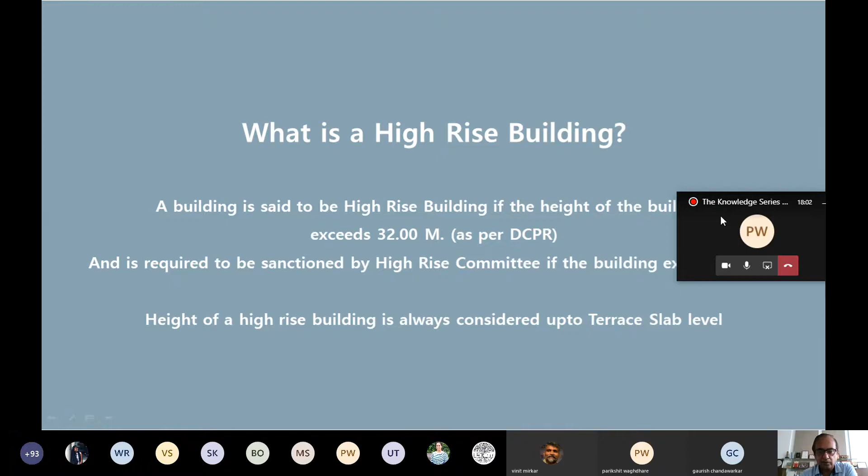When you consider the civil aviation NOC, even the water tank, lift machine room, and any other elevation features added on the terrace are also part of the civil aviation height consideration. However, when we talk about the height of the building, it is up to the top of the terrace slab.

So these are the parameters we need to look into for access criteria. For a high-rise building, these are the important factors. First and foremost is the access criteria - whether your plot is abutting to a particular width of road determines how much height of building you can construct.

When we enter the plot, the open space criteria comes into play, which is for light and ventilation, and the CFO requirement - because to fight fire within the plot, the fire engine needs to enter the property, and they want some basic criteria for open space requirements beyond light and ventilation.

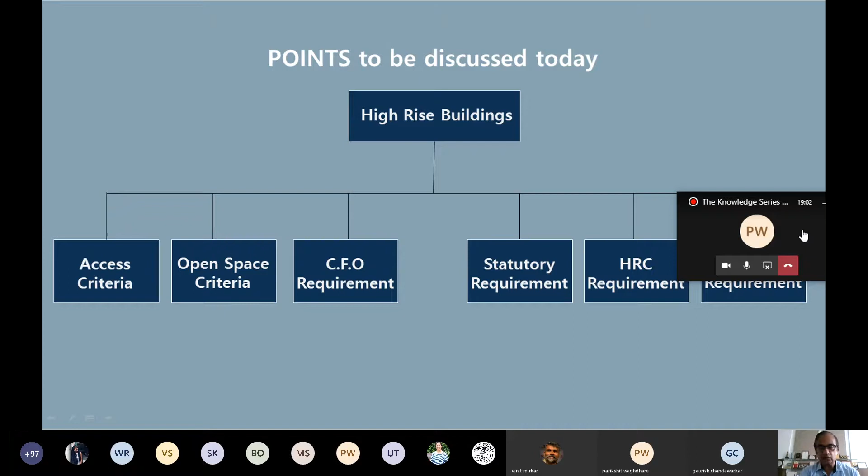And what are the other statutory requirements? Then there's HRC requirements and MOF requirements. So these are all the issues we are going to discuss in this part.

So public means of access - what is the public means of access required for any building? Every site should have access free of encroachment. Every site proposed to be developed or redeveloped shall have an access from a public street or road.

Such access shall be kept free of encroachment. So whatever width they mention in this table has to be free of encroachment, and it should meet at the particular junction with the other road.

So there are three parts to it. One is a high-rise building as per the table, whatever width of road is required. And there is some leeway - if there are two roads which are minimum 6 meters, then also a high-rise building will be permitted up to a particular height.

And if there are redevelopment proposals, particularly under 33(7), which is a cessed structure - 33(7)(a) is a tenanted building in suburbs not covered under cess, 33(7)(b) is a cooperative housing society, and 33(10) and 33(10)(a) are both slum redevelopment - there is a leeway for those kinds of proposals also.

Now, for high-rise building up to 32 meters, between 32 and 70 meters, you need to have a 9-meter road.

If the road is 6 meters... 32 to 70 meters, a 9-meter road will be required. And if the building height goes between 70 to 120 meters, the minimum width of road required increases.

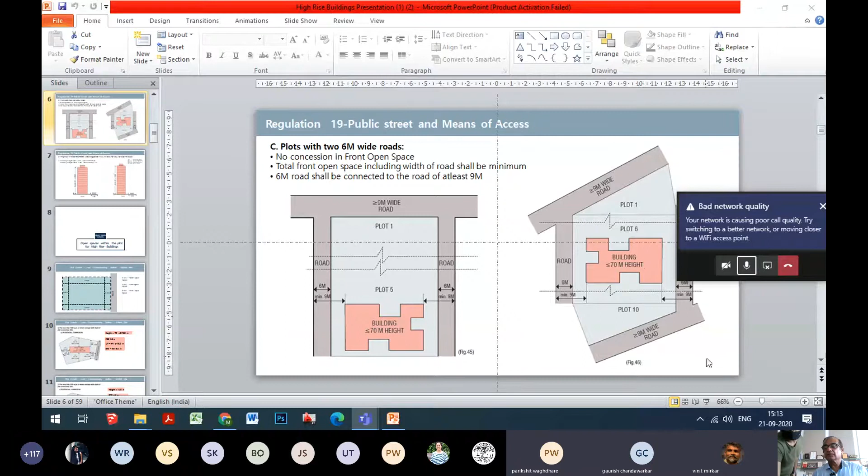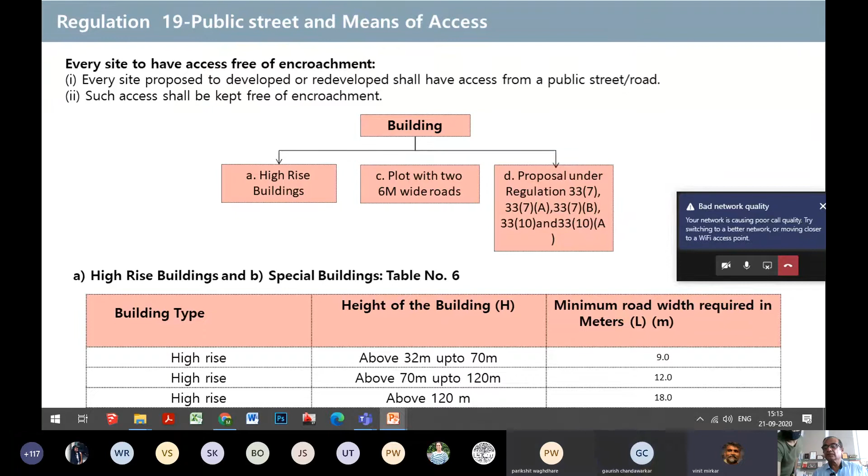Sir, you are not audible. Raisarya sir, you have to unmute yourself, sir. Hello, Parikshit. I guess he has a network issue, so he's trying to change over. He's unmuted now. Can you hear? Yes, we can hear you. Just switch off the video so that the audio network is better. Yes, sure. Can you see the screen? Hello, yes we can. It's audible, right? Yes, it's audible now.

So if there is a lesser width of road, but if you have two roads abutting your property, then even that height can be permissible up to 70 meters.

The criteria is: if two 6-meter wide roads are there, no concession in front open space will be granted. Total front open space, including the width of the road, shall be minimum 9 meters, and the 6-meter road shall be connected to a road at least 9 meters wide.

So where two roads are there, they have to meet the 9-meter road criteria, and if these two roads are 6-meter wide, the building height can be allowed up to 70 meters. So the table which we saw in the earlier slide will be relaxed if there are two roads.

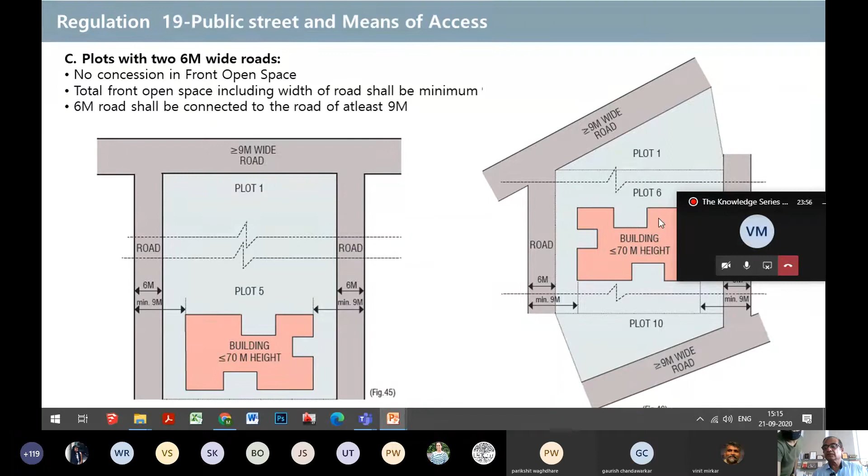And the example is also shown on the right hand side - there are two roads here, both 6-meter roads, ultimately culminating into a 9-meter wide road. So up to 70-meter height of building can be permitted.

Now, proposed redevelopment under 33(7), as we discussed in the redevelopment criteria - 33(7) is the cessed buildings in Island City, 33(7)A is tenanted buildings in suburbs and Island City also not covered under cessed category, and 33(7)B will be for cooperative housing society and slum redevelopment.

So building height up to 120 meters, road width can be 9 meters. In the other case, it was 12 meters. Here in all this redevelopment, they have relaxed it, and on a 9-meter width of road, 120-meter height can be proposed.

And if you want to propose more than 120 meters, the road width has to be minimum 13 meters. In all other proposals, this criteria was 18 meters. So as written here, 33(7) and whatever categories are there, it has been mentioned here.

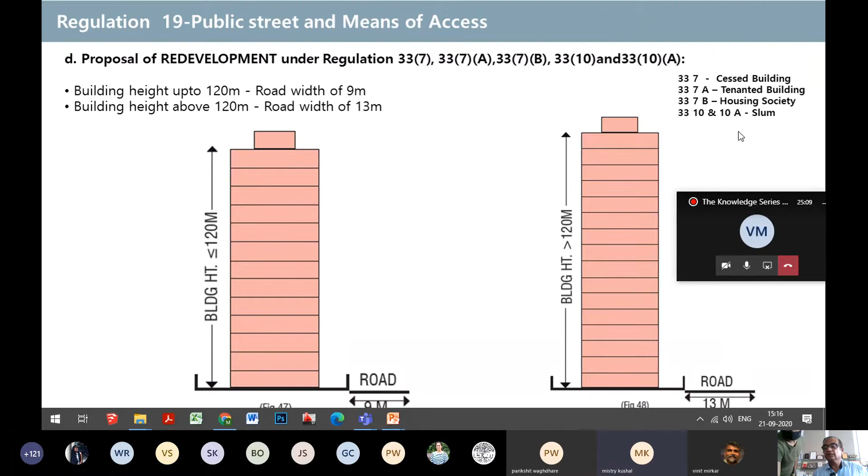Now we are moving on to the open space criteria. Open space is within the plot for high-rise buildings. So these are the front open space, side open space, and the rear open space. Two are side open space and one is the rear open space, front open space. So what are these open space requirements for?

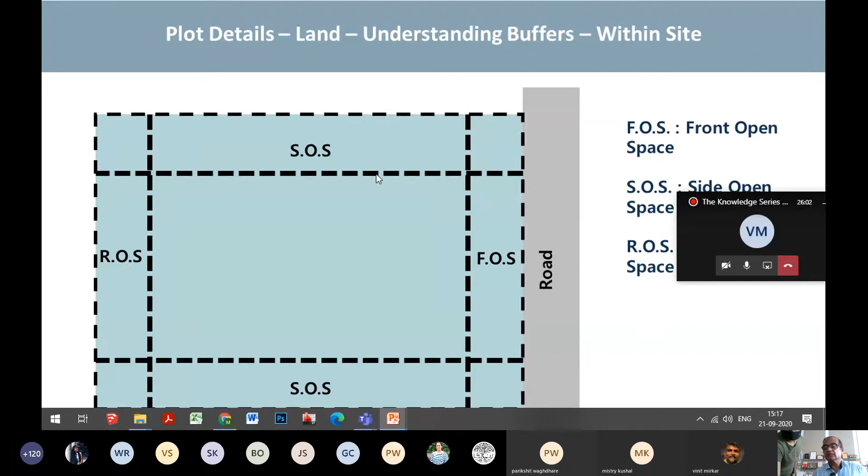Front open space is governed by other regulation where 4.5 meter is the constant front open space to be provided for any building, and the side open space and rear open space have been prescribed in regulation number 41. This is the criteria for building height between 70 meters and 120 meter height of a building, where front open space will be 4.5 meters, light and ventilation will be h by 4 or 16 meters. So 16 meter is the maximum open space to be provided. If it is a lesser height, even h by 4 also you can propose.

Whenever there is a dead wall, at this junction these are all 9 meters. This has to be light and ventilation, so it is 16 meters. Again at the corner, these are all 9-meter open space, and wherever we are taking light and ventilation, this will be 16 meters maximum open space required for a particular building. So even if you consider 1/4 of 120 meters, ideally it should be say 30 meters. However, the concession has been given, the maximum they have capped it to 16 meters for light and ventilation. So all these corners, wherever there is a dead wall, this will be 9 meters, and obviously front open space will be 4.5 meters.

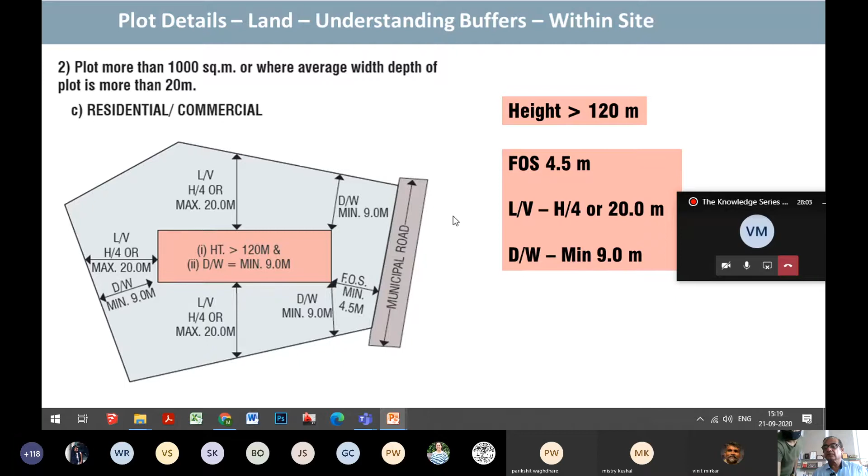Now buildings having height more than 120 meters - what are the criteria? In that criteria, front open space remains constant. Light and ventilation becomes 20 meters instead of 16 meters as in the earlier case. That dead wall will be a 9-meter criteria. This can be any height of building. Suppose if it is a 300-meter building, h by 4 criteria will require 75-meter open space, but that much open space is not required to be provided. Maximum is 20 meters. That is what the open space criteria will be looked into for a building which is more than 120 meters.

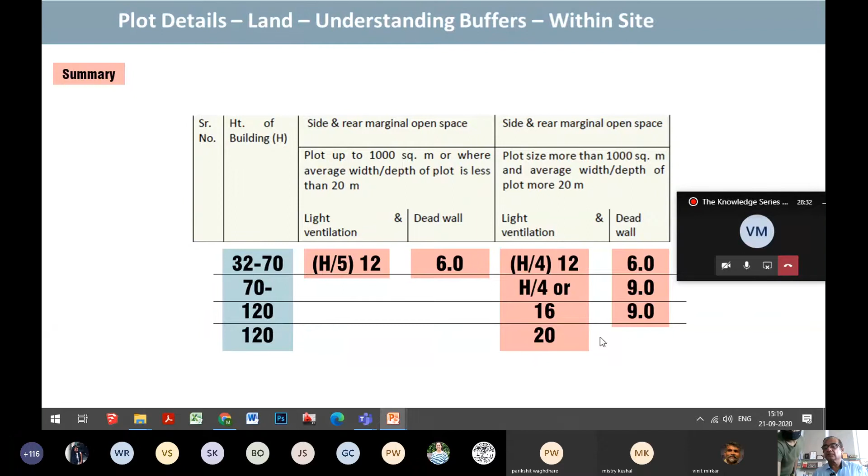Now this is in a nutshell. Of course, 32 to 70 I had not shown that open spaces, but this is the table where even open space of h by 5 also is permitted, with a minimum dead wall of 6 meters and the maximum open space of 12 meters. Between 70 and 120, 16 meter is the maximum open space, or h by 4, whichever is lesser, and this will be 20 meters for buildings more than 120 meters.

So for the height of building between 32 to 70 meters, any one side, that is A or B, must be 6 meters. In this case, suppose we are providing a 6-meter open space for the fire engine to enter and fight fire, other open space that you can decide as per your planning.

For building height more than 70 meters, if it is a rehab building, then one side needs a 9-meter road with 9-meter open space. This leeway is given only for rehab buildings, but for a sale building with no redevelopment, two-side 9-meter road is a must.

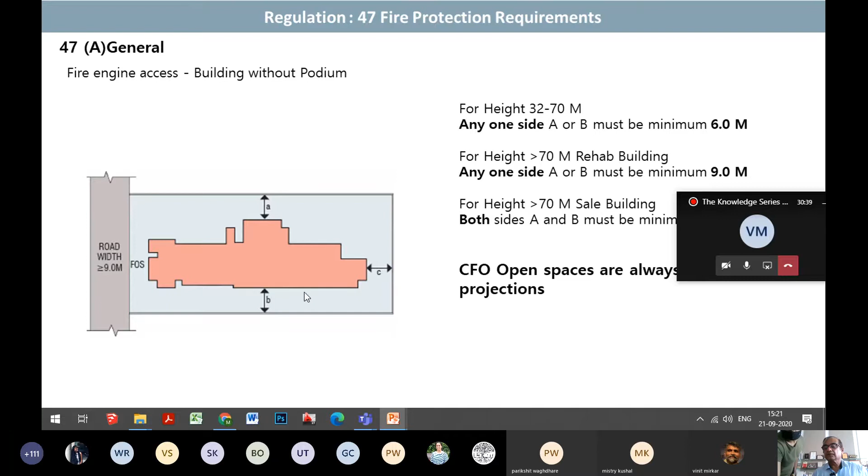So both sides A and B will be 9 meters. In case of rehab, this can be 9 meters, and this open space can be as per your planning. The CFO will not permit any projections in these open spaces, not even the Chaja line. Only the cantilevered portion of a refuge area can be proposed in these open spaces. Otherwise, the building has to have an open-to-sky open space.

Now, whenever we propose a podium, what are the criteria? Since 9 meters is the open space required at ground level, they will allow setback only up to 6 meters. This is because if the fire engine is here and the tower is for rescue, they can go up to only 6 meters - that's why this 6-meter criteria exists. Earlier this was at 3 meters, but now it's 6 meters so that you can have a driveway on the podium level on top.

Even in this case, a 6-meter leeway is given, but you can project by 1.5 meters outside. Even if this is a 9-meter open space at the ground level, for a height above up to 4.5 meters you can propose a 6-meter open space. So this you can encroach by 3 meters, but at ground level 9 meters is available so the fire engine can be parked there with its supports.

Up to a height of 4.5 meters there is a restriction, otherwise the building can come out. So the podium cannot extend 6 meters beyond the building line, for the fire engine staircase, fire engines, and hose reel to reach the building. In case of podium height of 4.5 meters from the compound wall, the podium must be 9 meters clear, and above that, 6 meters clear open space has to be provided.

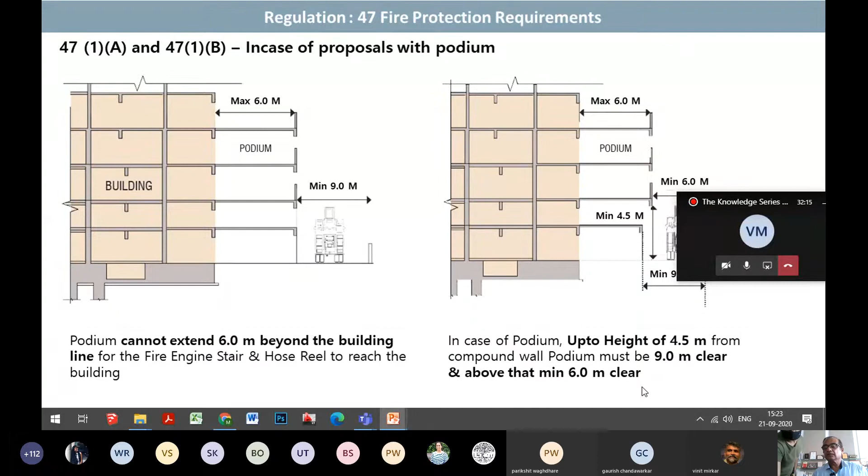Now regulation 47(1)(a) for the proposals - these are all redevelopment clauses. 33(5) is MHADA redevelopment, 33(6) is redevelopment for dilapidated buildings. Again 33(7), 7(a), 33(9) is cluster, 9(a), then 9(b), and 33(10) and 33(10)(a) - these are all for redevelopment.

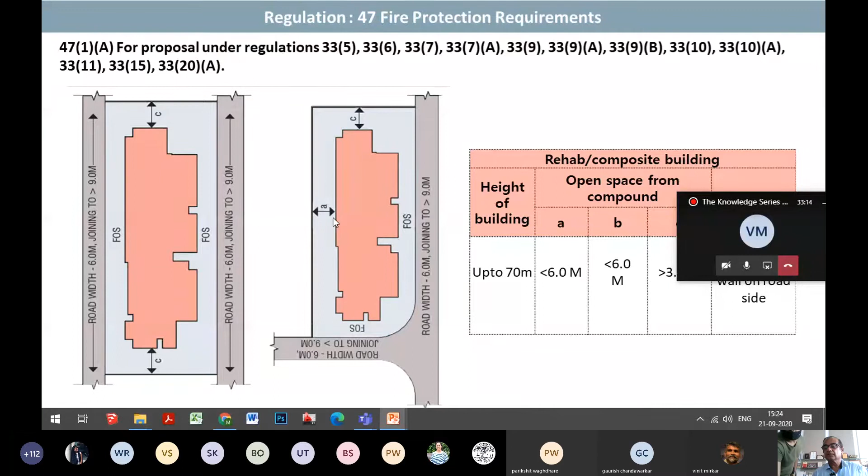If you have two roads which are 6 meters, then you need not provide any side open space of 6 meters. This C open space can be as per your planning - you can provide minimum 3.6 or 6 meters as per whatever the planning criteria permits. Even here, if there is a junction, that means these properties also have two access roads, so front open space is enough. This 6 meter need not be provided, and the C and A open space can be as per your planning.

Now, internal staircase - how should a staircase be designed? If there are 4 flats per floor numbered 1, 2, 3, and 4, these are the passenger lifts, and the staircase area is here, abutting the external open space.

This staircase is approvable with the ventilation shaft, because the ventilation lobby should also have external ventilation. So this is approvable with 2 lifts and the staircase criteria, but this one is not approvable because it does not have ventilation to the lobby - the lift lobby does not have any ventilation here, that's why it's not approvable.

However, in this case there is a ventilation lobby. This staircase is not like that case - it is internal, but it has a pressurization shaft, which requires 9 square meters. Internal stairways with pressurization shaft are allowed, but they won't be considered as a CFO staircase.

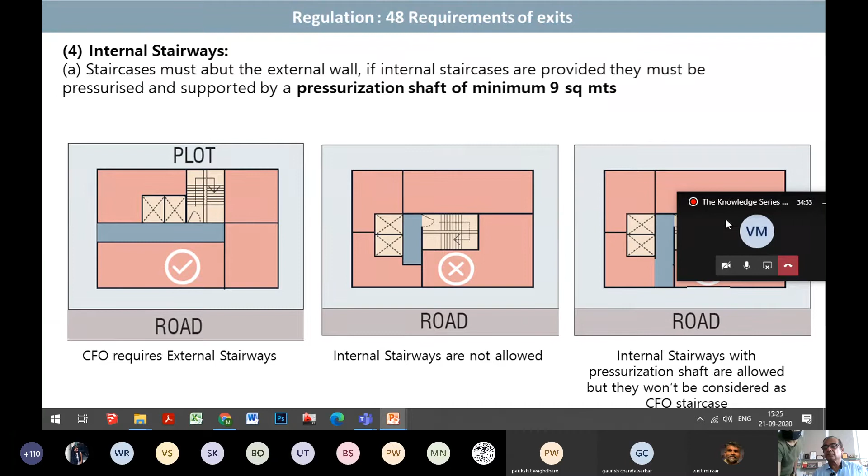What does this mean? When the building height goes above 70 meters, we need to provide a second staircase. So one of the staircases has to be on the external side, and the second staircase can have a pressurization shaft and be an internal staircase.

No open staircase is allowed for high-rise buildings. This type of staircase is not approvable because it needs an enclosed staircase. This is the enclosed staircase with a door closer, so it remains always closed. So if there is a fire anywhere on this floor, this staircase is independent, and evacuation can happen. But here, if there is a fire here or on this side of the flat, this staircase is not approvable.

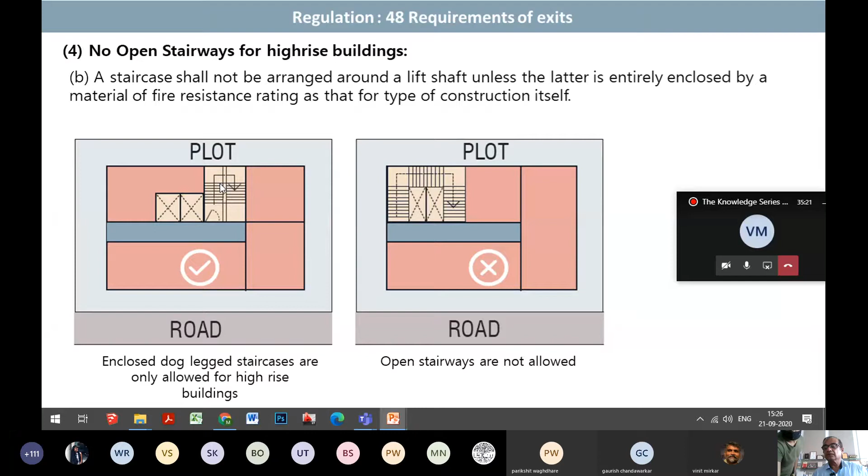This is a C-type staircase where the lift is in the center and the staircase moves around everywhere. Of course, this can be permitted for a building less than 32 meters, but above 32 meters this staircase is not approvable - we'll have to go for a different plan for this staircase.

Now, how do you provide access to the basement? The basement has to be cut off because it is considered more prone to fire. If the same staircase goes to the higher floor, the entire staircase will be gutted in fire. That's why the basement staircase access has to be separate.

In this case, this staircase moves up to the first floor, and this goes to the basement. So there has to be a wall constructed so that there is no aperture between the staircase going up and the staircase going to the basement. Where a building has a single staircase, it should terminate at the ground floor level, and access to the basement shall be by a separate staircase.

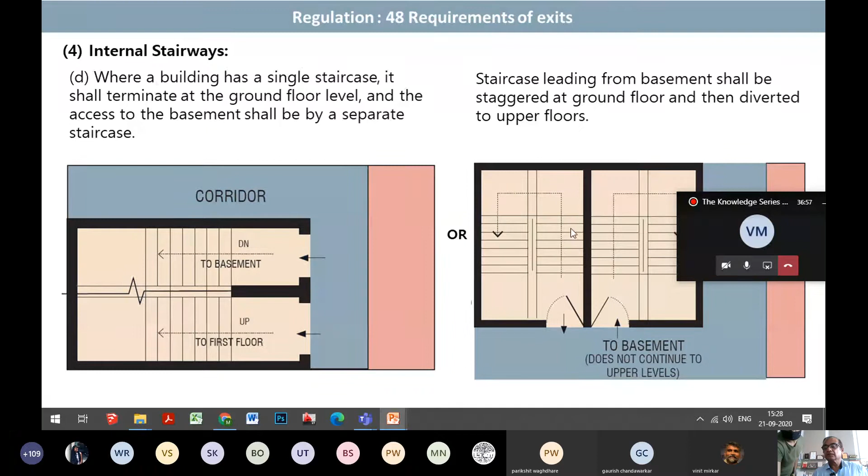Or this is a solution. If you are unable to design in this fashion, you can propose the main staircase terminating here on the ground floor, and a separate staircase going down to the basement. So they are both bifurcated. The staircase leading from the basement shall be staggered at ground floor level and then diverted to upper floors. This staircase to the basement does not continue to upper floors; it will be restricted up to the basement only. If you have one, two, or maybe three basements, this staircase will terminate here, and a separate staircase will start from the ground to the upper floors.

Now, additional staircases. There are norms for the number of staircases to be provided. Up to 70 meters, one staircase is permitted. Under what criteria is this allowed? For building height up to 70 meters, it shall be provided with two enclosed type staircases, each having width not less than 1.5 meters. However, if the floor area excluding staircase, lift and lift lobby area - the net habitable area - is less than 500 meters, then one staircase is no problem.

You can propose it if your staircase meets the travel distance criteria specified, that is 11.25 meters from the dead end. This is less than 11.25, so one staircase is allowable. And for a commercial building, if this is 15 meters, then also one staircase is no issue.

But if it doesn't meet this criteria - suppose hypothetically this area is say 600 meters - then obviously one more staircase has to be proposed. And if it doesn't meet the travel distance criteria, then also an additional staircase will come into the picture.

However, for high-rise buildings above 70 meters, there will be two staircases of 2 meters width each. That is a compulsion. Even though the floor area is say 400 meters, this criteria won't work because the cutoff level is 70 meters only, and once you cross 70 meters, the second staircase has to be provided.

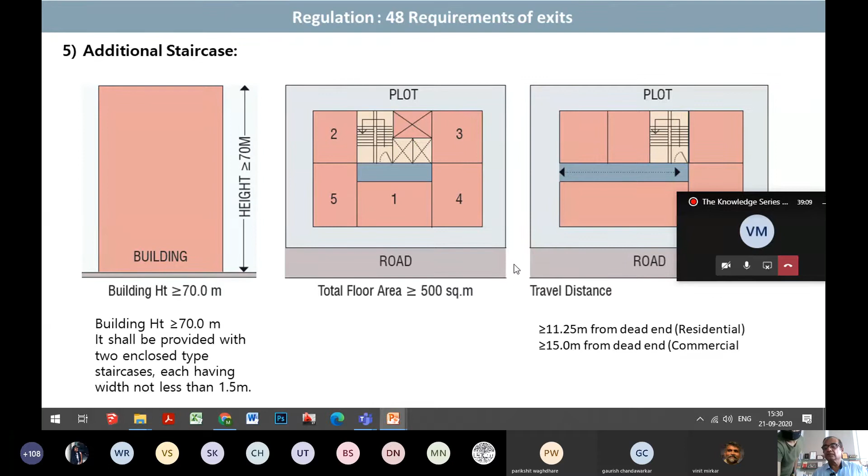There is one more criteria, which is the refuge area. The refuge area shall preferably be provided within the building line at floor level. Ideally all refuge areas have to be provided within the building line, and now cantilever portions are not allowed - earlier they were permitted, but now it's restricted within the building line only. In case of buildings more than 32 meters in height, the first refuge area shall be provided at 24 meters.

So if this building is 32 meters, at 24 meters the first refuge area will have to be proposed. Thereafter, the refuge area shall be provided at every 7th habitable floor - so you can have a gap of 6 floors, and at the 7th floor we'll have to propose the refuge area. The refuge area shall be 4%, though some leeway is given now. Earlier they strictly adhered to 4% only; now they are allowing between 4% to 4.25% of the habitable area it serves, and it will be free of FSI. But it cannot include staircase, lift and lift lobby area - it has to be just habitable area provided within this range, and then it will be permitted free of FSI.

Hypothetically, if this area goes to 4.5, that 0.25%, because of the planning constraint, many times it so happens that refuge area we are not able to consume within this 4.25. We have to propose 4.5 also. That 0.25 will have to be counted into FSI as such.

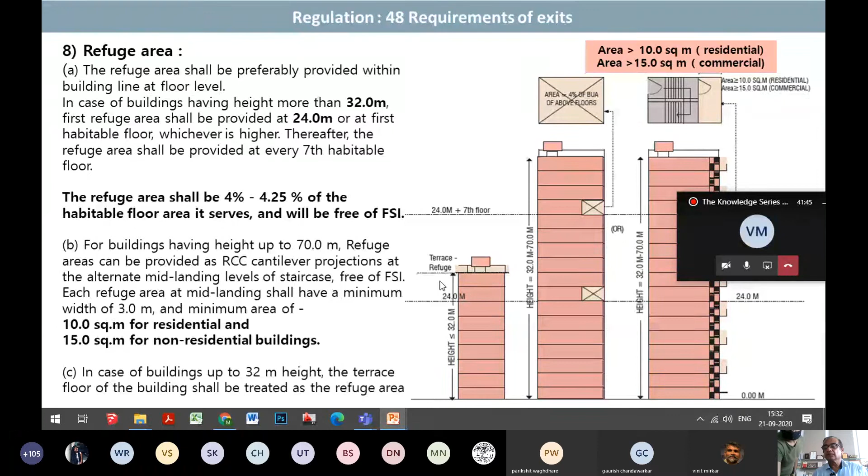Now, in case of buildings more than 24 meters, at least 2 lifts are required. So what are the requirements for the lifts? Minimum 2 lifts shall be required in order to serve each dwelling unit. One of these lifts shall be a fire lift, which shall be in conformity with fire safety regulations. It shall be ensured that at least one lift must serve access to the lowest level of basement and may also extend up to the terrace floor, except in areas where civil aviation and other restrictions operate.

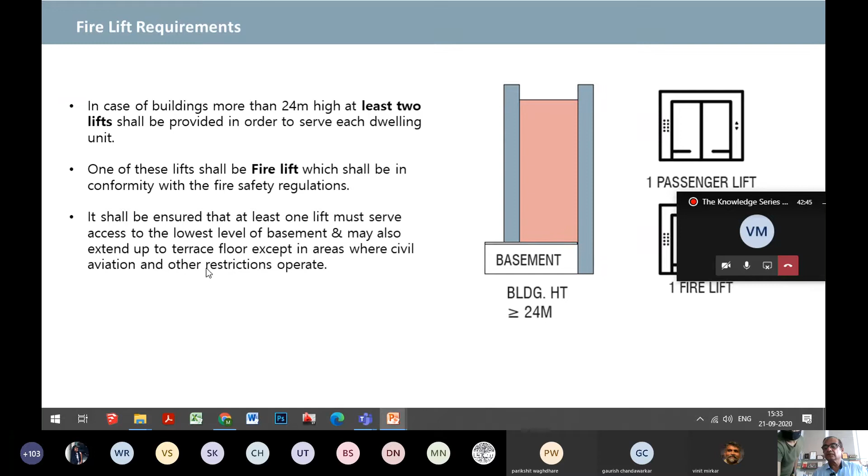Now, this is the important addition which MCGM has done in this DCPR: the access to the terrace is given by the lift now. So that is also a choice of the architect, where he can take the lift up to the terrace and use it for recreation purposes. There can be gardening or a yoga center or whatever, open area terrace can be utilized when access is allowed by the lift as such.

Now, artificial ventilation. The bathroom, WC, staircase, storerooms, prayer rooms, these can derive ventilation through an artificial ventilation shaft.

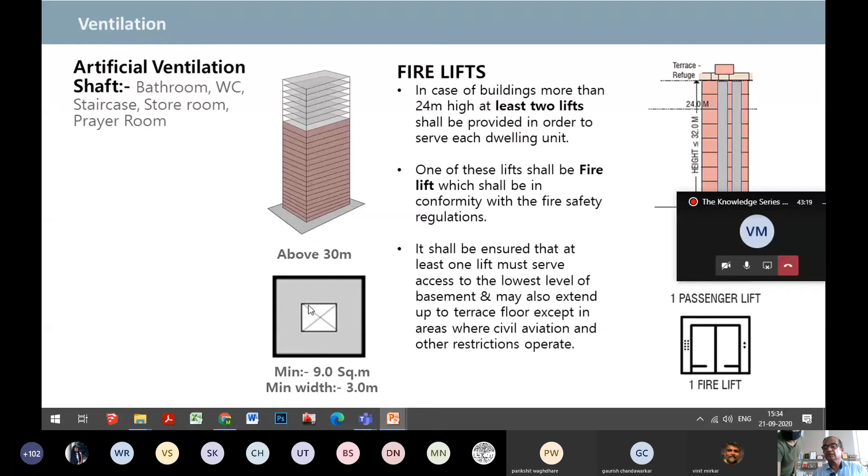So fire lifts, in case of buildings more than 24 meters, at least 2 lifts shall be provided in order to serve each dwelling unit. One of these lifts shall be a fire lift. And above 30 meters, this ventilation shaft has to be 9 meters for the duct to be adequate. Now, statutory other requirements.

Free and counted in FSI for high-rise buildings: podium car parking, basement design, stairway design, and parapet design. So these are all staircase deductions which are allowable free of FSI, however by charging a premium as per the ASR rate. ASR rate is ideally known as the ready reckoner rate. You have to pay 25% of the ready reckoner rate for whatever deduction you are proposing to claim.

So these are the lift shafts. Obviously, these lift shafts will be allowed free of FSI. And if the building is between say 32 to 70 meters, this will be allowed 1.5 times B2, where B2 is the total width of the lift shaft. So from the center line on both sides, you have to draw, and a total width of 1.5 times B2 will be allowed. Of course, these will all be overlapping because there are 3 lifts shown in this diagram, so this will be the total extent of the deduction permitted.

So this is the depth, D is the depth of the lift, so into 1.5 times, that will be the lift lobby. Even if the lift lobby is larger, this light blue color will be counted into FSI. The dark blue color, whatever is proposed here, that will be exempted from FSI computation. And this will be the smoke vent. Smoke vent also, maximum they permit up to 1.5 meters, and this is 1.5D. So whatever is the depth of the lift, that much is permitted free of FSI.

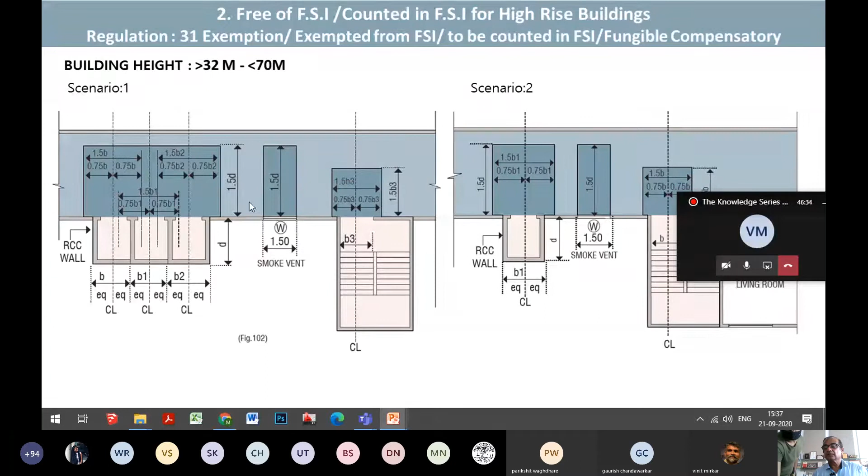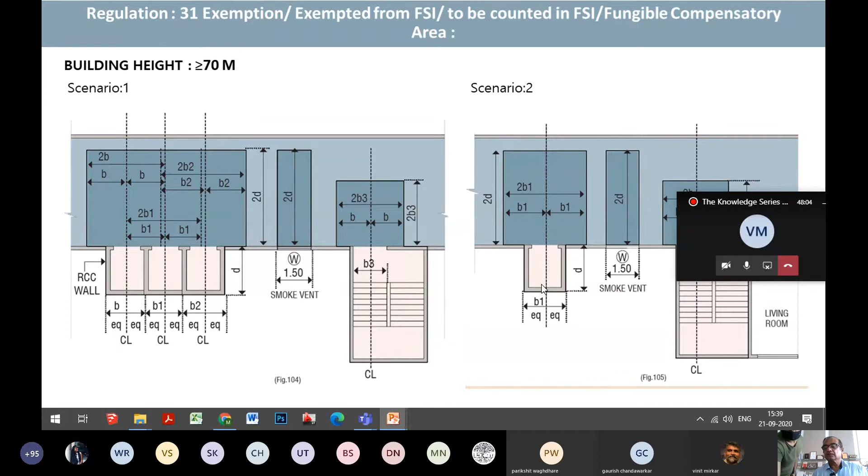These are all similar examples with a separate setup of the lift portion. Now, podium, how many podiums can be permitted, and what is the maximum extent of podiums we can propose for car parking? Podium can be permitted for plot size measuring more than 1000 meter only. If you have less than 1000, podiums are not permitted. Obviously when we are talking of a high-rise building, most of the properties will be more than 1000 only.

The podium provided with ramp may be permitted in 1 or more levels, total height not exceeding 32 meters above ground level. So from ground level, this total height can be 32 only; you cannot propose more than 32. Of course, there will be a stilted portion above that, and then all the habitable floors will start. These can all be accessible from a ramp, or this can be accessible by car lift also, so that is the choice of the architect.

What are the constraints? Ideally, the ramp is always better to propose because there is no dependency, but if you want to propose a car lift, that is also admissible. So clear distance of 3 meters needs to be proposed from the boundary, so whenever we are proposing a podium, this open space has to be minimum 3 meters, and the podium line should be maintained. Podiums with car lift.

If there is a car lift, minimum 2 car lifts are required. Even if you are proposing say 100 only, then also the minimum 2 car lift criteria will come into the picture. And if you are proposing say 300 car parks or part thereof, one more car lift will come into the picture. If it is between 300 and 400, then even a 4th car lift will come in. So one additional car lift for every 100 car parks, and 2 car lifts up to the first 200 car parks. Even if it is a 50 car park building, 2 car lifts will be compulsory.

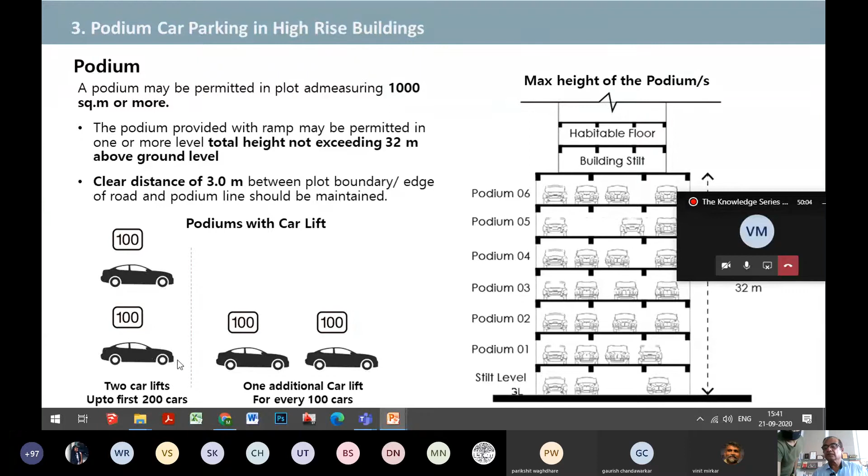Now this was the front open space which I spoke about in the earlier slide. The minimum criteria is 3 meters front open space, and all around you have to propose a minimum 3 meter open space for the podium. So this can be used for car park, and the building can be on this side. Here that 6 meter criteria won't work because the building is flush.

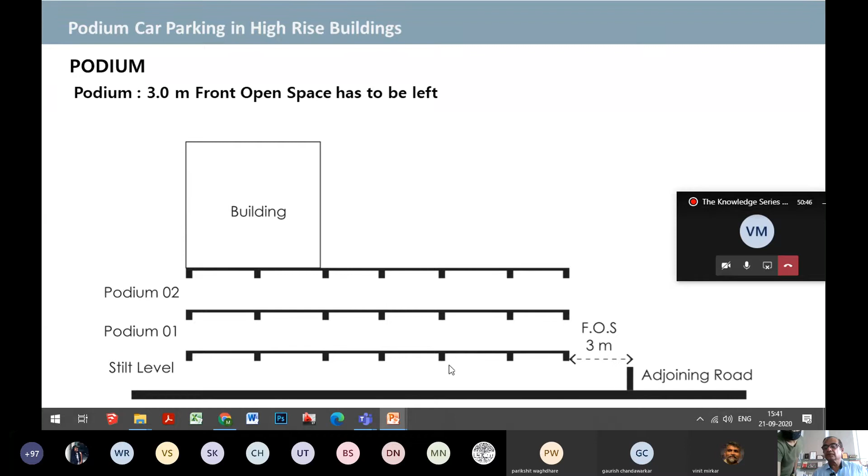So maybe the designing criteria is that on 3 sides the building will be touching the podium. On one side you can have leeway because fire will not be fought from that side. Fire will be fought from only one side and the other 2 sides only. That's why they will give you leverage for any extent of the basement on this side.

Front open space remains constant. It is always free of FSI whenever basements are proposed, unless you utilize it for offices, malls, or anything else. But for car parking, this will always be free of FSI. The basement may be constructed beyond the building line, provided there is a clear distance of 3 meters.

Suppose in this case, the building line is like this. So the basement is extending beyond the building line, but there will be an open space criteria wherein 3 meter open space from the front open space for the road, and 1.5 meter from the other edges. So these three open spaces can be 1.5 meter also. Then this open space will increase if the depth of the basement is increasing.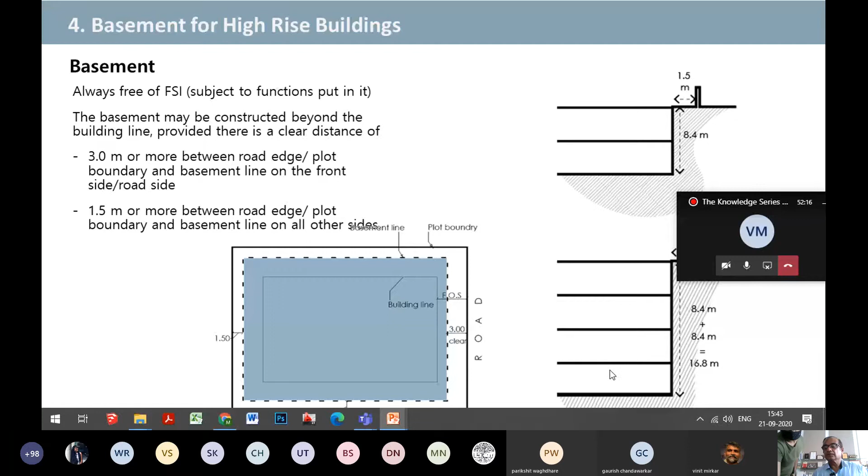So in this example, the basement ventilation has to be natural ventilation. If you're providing it, then minimum 0.9 meter plinth you have to propose, and maximum 1.2 meters. But ideally this is not workable, and it has the issue of seepages or leakages also. That's why most designers prefer to make it a bunker only, totally flush, with no ventilation.

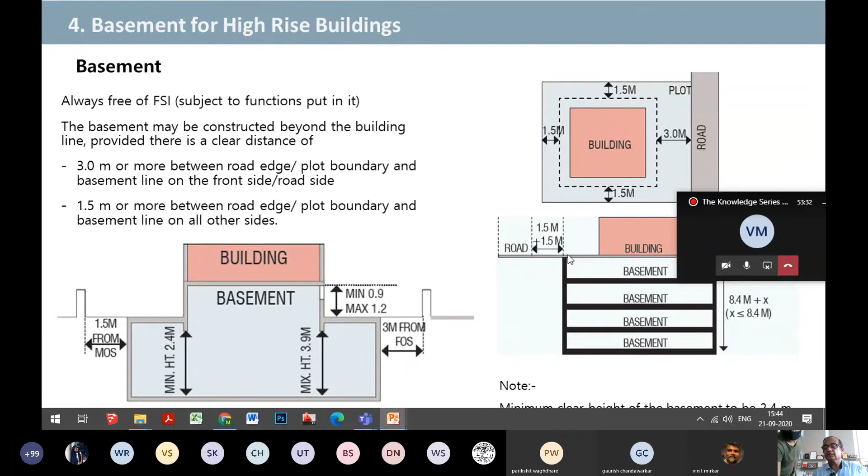This will all be artificially ventilated, because natural ventilation only works in the first basement. When you propose a second basement below this, you will have to depend on artificial lighting and ventilation. So this option works for buildings where there are multiple basements and it is flush, because this needs to be flush. That's why, since it extends beyond the building line, this will be a driveway for your cars and everything. Many times these criteria don't work. So if you are proposing this type of setup where the basement is flush to the ground and artificial lighting and ventilation is proposed, this is also permissible.

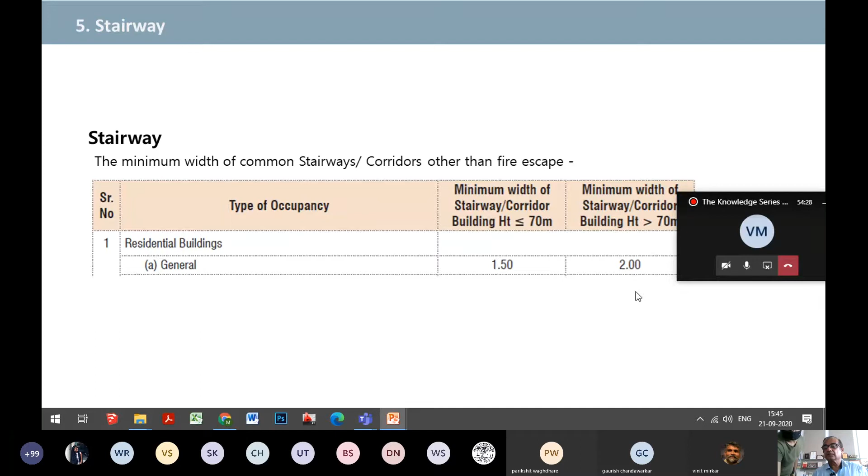Now, for stairways, a building which is less than or equal to 70 meters requires 1.5 meter width of stairway, which is good enough. For a building more than 70 meters, 2 meter width is compulsory. Plus, there is a second staircase also involved, primarily used for fire escape purposes, and you can propose any height of building, even 300 meters. But 2 staircases will be compulsory, subject to those staircases meeting the travel distance criteria. Normally a residential building will definitely meet the travel distance criteria, so 2 staircases of 2 meters are more than enough.

Now for parapets, there are also some rules. If the building is between 32 and 70 meters, the parapet wall can be increased up to 2 meters within the balcony portion. Parapet walls and handrails provided on the edges of the roof, terrace, balcony, etc. shall not be less than 1.5 meter from the finished floor level. A parapet wall having height more than 1.5 meter may be allowed on the topmost common terrace level. So this is the parapet allowed for buildings up to 70 meters.

Once it crosses 70 meters, this can have a 5 meter height for elevation purposes with a slit, 60% void and 40% solid. So these are all solid portions, and these slits are the 60% which are voids.

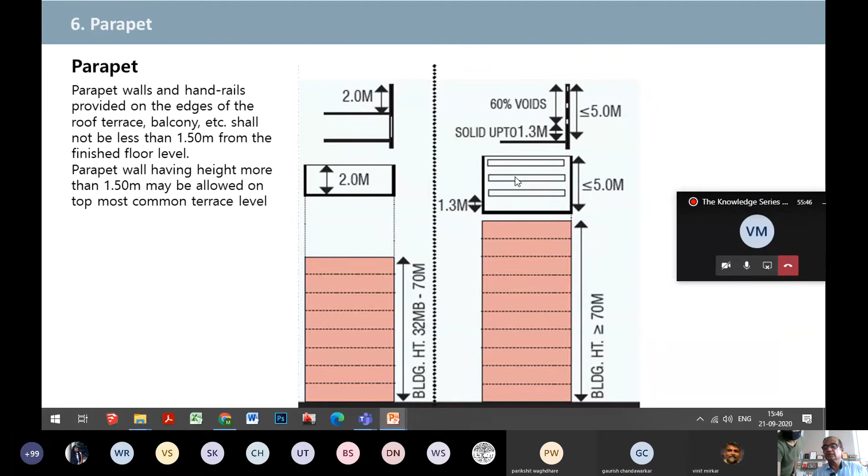So architect can design a parapet to hide all the water tanks, lift machine rooms within this 5 meter criteria, to enhance the beauty of the building. And of course, the voids should start above 1.3 meters. So from the terrace level, this has to be 1.3 meters, otherwise you can have aperture on the upper portion.

Now, HRC requirement, essentials for the HRC requirement, that is high-rise committee. High-rise committee basically is constituted with professionals who are involved in specialized high-rise buildings only, chaired by the IAS officer of the rank of principal secretary. Structural engineer is there from IIT or VJTI. Soil mechanics faculty is there from IIT or VJTI. And practicing registered structural engineer who has worked for more than 10 years is also part of the member.

CFO is ex-officio because their NOC is required, so chief fire officer is part of the committee, and any other technical member whom the chairman deems fit to be appointed. All these criteria will basically be for buildings which are crossing 120 meters. So below 120 meters, there is no high-rise criteria. Earlier this was 70 meters, which in DCPR 2034 has been pushed to 120 meters height of the building.

So there also the requirement of CFO compliance, services layout, these are the parameters which the committee will look into. So CFO requirement, services layout, staircase placements, and basement and ventilation cutouts. These are the factors which CFO and the committee will look into, where this is a case study we have shown.

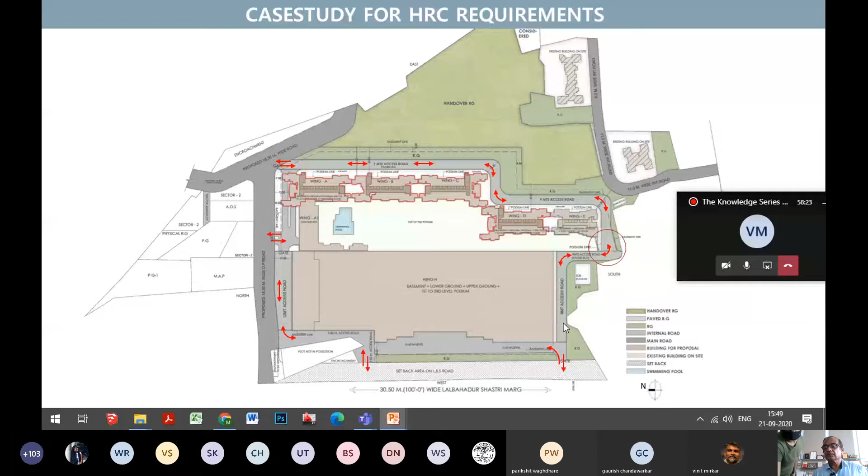So fire engine movement, we have to show how the fire engine is going to enter, suppose if it is entering here and from where it exits from here, or if it is entering from this side, how will it enter, and vice versa also. So this is the important criteria which the fire department will look into if there is a high-rise building.

And the compartmentalization, if there is a sprinkler proposed, this compartmentalization will be for 3000 meters, otherwise it will be 2000 meters. You have to provide a shower curtain here. So all these sections will be divided accordingly. The entire basement is divided into 10 parts.

So these are all compartments where there will be independent staircase also. The purpose is whenever there is a driveway and suppose there is a fire in this zone, this should get cut off. The fire should not spread to other parts of the building, and it should be just restricted to first part. If there is a fire here, the alarm buzzer will start, and all these fire shower curtains will start activating, and the fire will be just controlled in this section only. It will not try to go into the other sections.

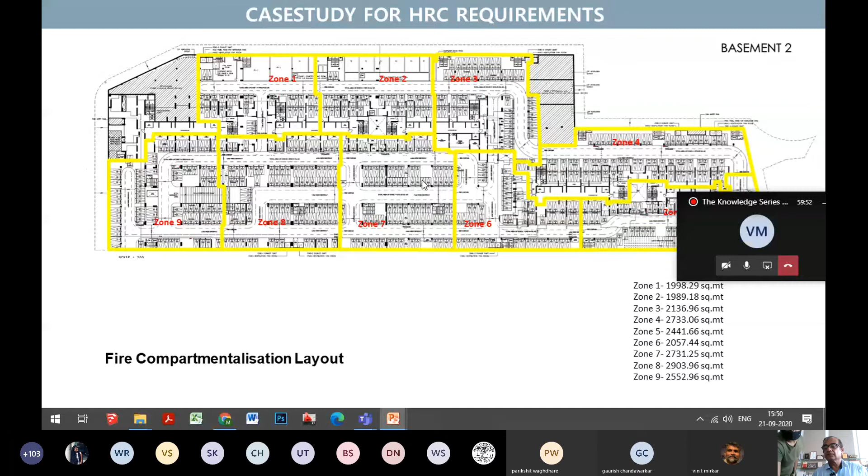So this is the purpose of compartmentalization. And if you can propose a wall also, so this can be a regular wall. Only in the driveway portion there will be a shower curtain proposed here. So whenever there is a fire, it will be doused here itself, and the sprinklers will be triggered off. So all this will be controlled by the fire protecting measures. So these are several zones proposed in a basement, and of course each zone has to have a staircase which can go up to the main lobby. So these criteria need to be looked into.

Now this is the refuge area proposed. So if there are say 2 staircases, there are 10 flats proposed around the building. Now, as I was talking about the travel distance, from this staircase to this staircase here, this should be within 60 meters criteria. So travel distance, once it is met with, this staircase is okay.

And there are lifts proposed of course, considering the height of the building, because this particular building is a 57-storied building, and according to the load, this many lifts were required. And obviously the other purpose was to get the entire area of the lobby free of FSI.

And here also they have given an FRD door, so that this will get cut off in the lift lobby itself. So fire will not transfer to the staircase portion and all. That is how the plannings are proposed.

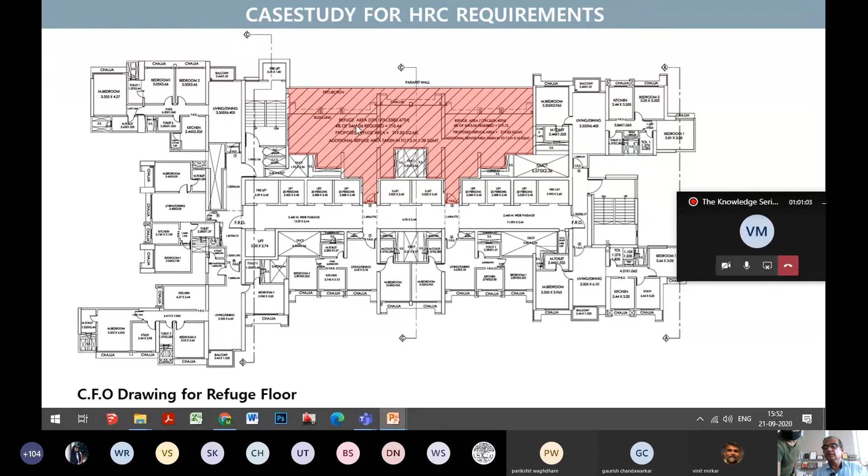This is a refuge area, where the refuge area will be proposed on this floor. There are two entrances, and two flats are proposed for refuge purpose, as per the calculation we have shown in the other slide. These are travel distance for staircase in the basement.

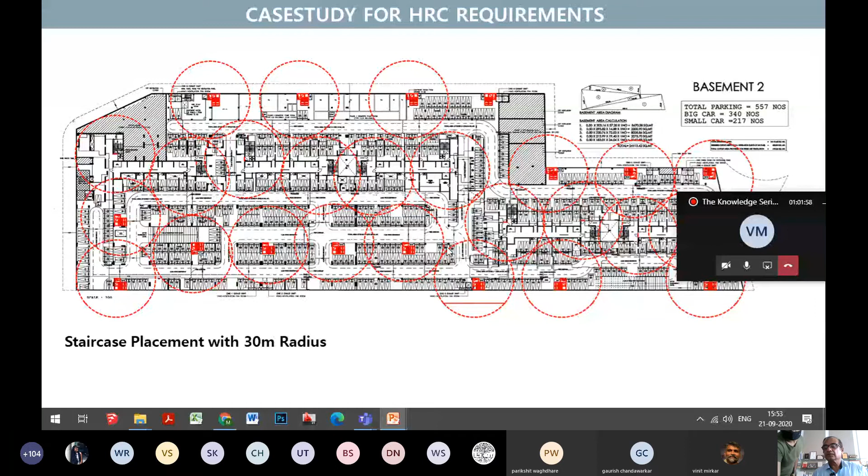Now the important part in the basement is ventilation. If there are 2 basements or 3 basements, each basement should have 2.5% ventilation cutout. That means the third basement will have a total ventilation cutout of 7.5%. The lowest will be 2.5%, the middle one will be 5%, and the top one will be 7.5%.

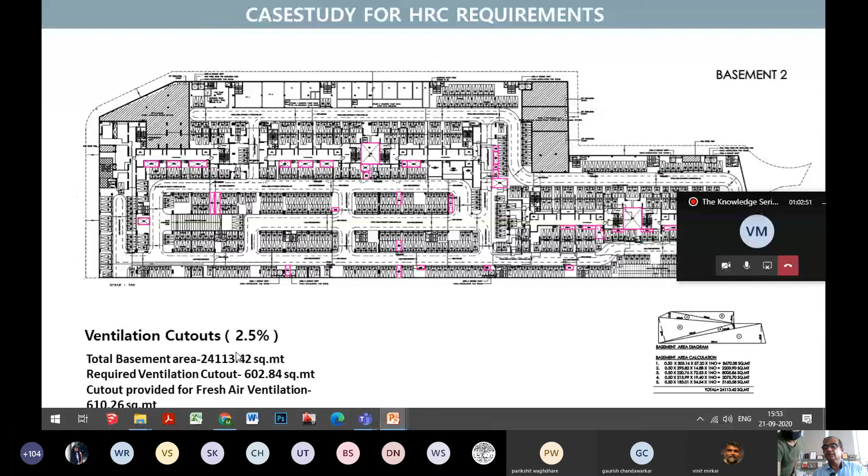So these are the cutouts which we need to provide, because this will serve as light and ventilation to the basement, since artificial ventilation will be shown with ducts. In case of fire, the smoke will not stay within the basement area, and it will go out through this cutout. So these are some of the areas shown as per the requirement.

Now MOEF criteria. MOEF criteria are applicable to plots with built-up area of more than 20,000 square meters. This built-up area is basically not FSI; it covers non-FSI area like staircase, lift lobby, clubhouse, basement area, podium area, refuge area, all those areas. That means a constructed area. So constructed area is this criteria.

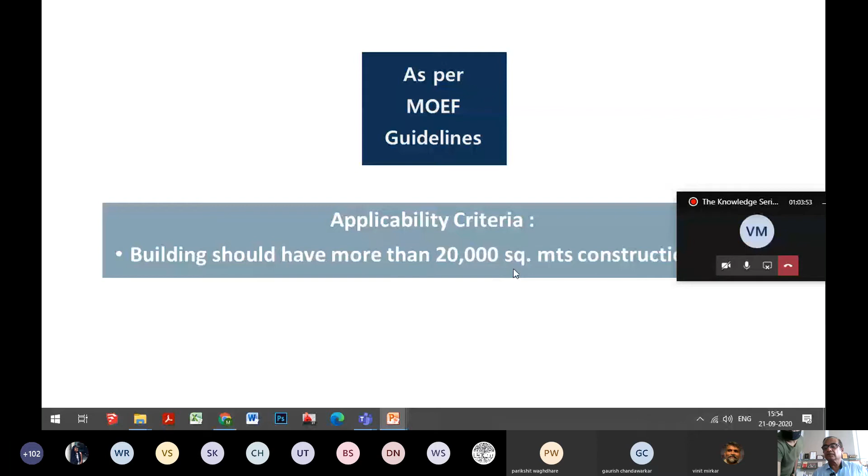20,000 meters is the total constructed area, and most high-rise buildings will be covered by this criteria, because if it crosses 120 meters, the building height's habitable floors has to be minimum 34 to 35 floors, with the remaining as podium. So definitely it will cross the 20,000 square meter criteria.

So what criteria does MOEF look into? That is the tower component, the day lighting and how it is affected, CFO and traffic movement, that is fire tender movement. Of course all this is also looked into by the high-rise committee, particularly the CFO issue. However, the MOEF criteria are more strict and stringent.

Debris and disaster management is also one of the factors we need to take into consideration when we design a building. And ecological features - organic waste, solid waste, STP, RWH that is rainwater harvesting, solar energy, alternative energy component, RG as per DCPR - preferred on Mother Earth by MOEF, because the DCPR says one rule, but when the MOEF committee looks into it, they look into some different parameters.

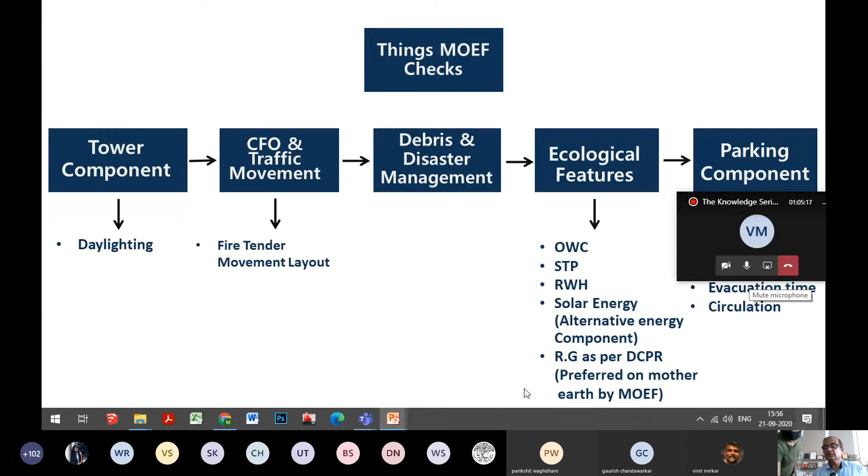And for the parking component, they definitely look into the evacuation time and the circulation. Evacuation time cannot exceed a prescribed time limit, because in case of fire, all the vehicles need to be evacuated within that prescribed time. That's why the circulation part is also important.

So here is a shadow analysis, which I think all students must have learned in 4th and 5th year, showing how the building impacts lighting and ventilation to adjoining buildings, and whether windows have adequate light or there are dark spots in the plan. This plan shown here is adequately lighted. There are dark portions somewhere, but no black portion anywhere in this planning.

If it is facing the east-west portion, you can see the lighting is much better. When you go to the north side, the lighting will definitely be lesser. So this portion is north, this is east, and this is the west side.

And suppose there are dark portions, the committee may ask you to provide a full French window, and the window size needs to be increased, or they may ask you to change the orientation of the building, particularly at different times. So this is at 9 o'clock, this is at 12 o'clock, this is evening 5 o'clock.

And what is the shadow range? So the building, particularly in this case, this is the building. Whatever is the height of the building, all these buildings are far away, so it is not creating any impact of shadow on the adjoining buildings, and it is adequately ventilated. If you see this portion also at 9 o'clock, maximum shadow is going up to here, however it is not entering that property.

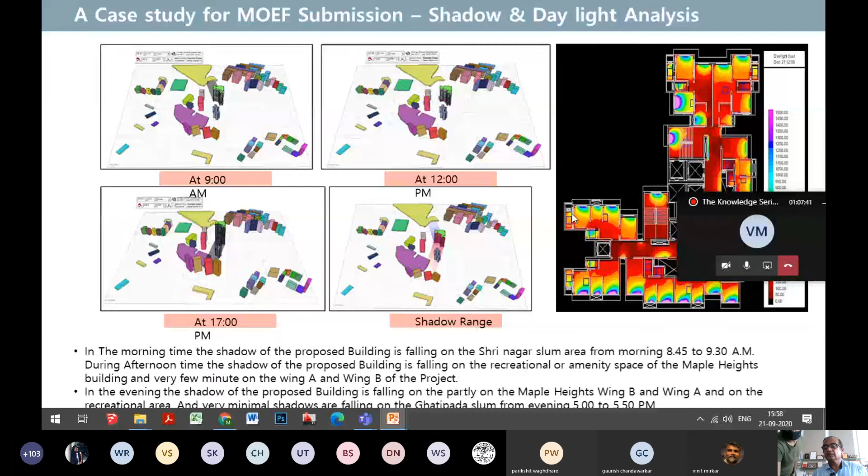Suppose there is a toilet and it is a dark portion, they may ask you to increase the size of the window in the toilet, so that there will be proper light and ventilation to the toilet portion. Now, this is a case study where we have provided ultimately what criteria they will look into.

See, these are the drawings they need. Particularly, they want a plot boundary where the STP has to be marked, pump room has to be marked, DG set has to be marked, battery backup has to be shown, OWC organic waste at stilted portion, meter room has to be differently marked, domestic and flushing fire tank has to be shown.

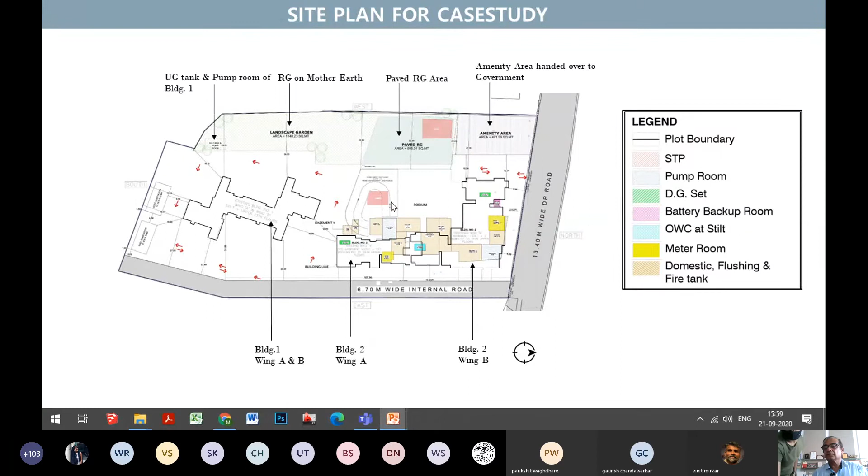So this is the RG area which is paved. This is green which is on Mother Earth, and amenity area which is to be handed over to MCGM, and all those STP meter rooms. These are the meter rooms, and some STPs are shown here. So these are the criteria which the MOEF committee will look into, and the section showing the total height of the building.

And suppose there are cars, of course in DC regulation the scooters are not compulsory, it is optional. MOEF committee definitely wants some scooter parking to be provided, ideally within 10 to 15%. In this case it is within the 10% criteria, so scooter parking has to be provided.

And they are particularly very much conscious about how much car parking area you are proposing, so they don't want excess construction also to happen, because it is against environment laws as such. So they want to know how much area you are going to provide per car parking. So 13.75 is the area for each car.

Number of cars are there, this driveway also is there, so this is between 18 to 25. If you see, all these criteria are almost matching the requirement, except for podium 2, because the car park has reduced and because the green garden is proposed. Otherwise, the criteria between 18 to 25, that is the constructed area per car, is the criteria which normally they follow.

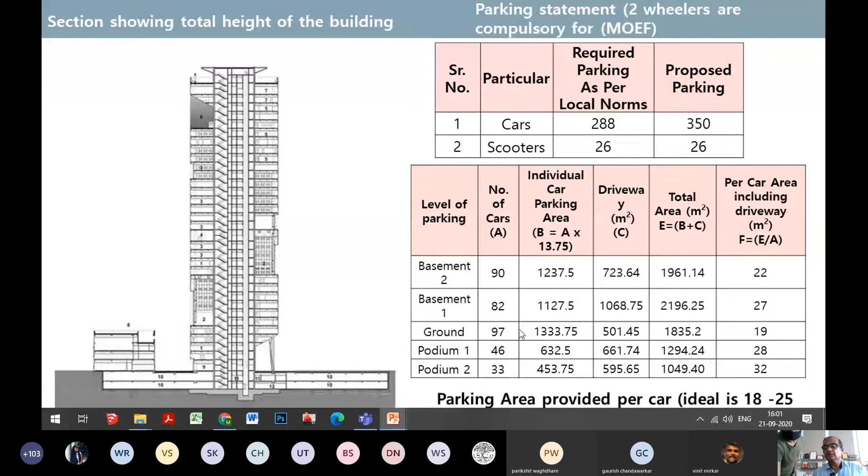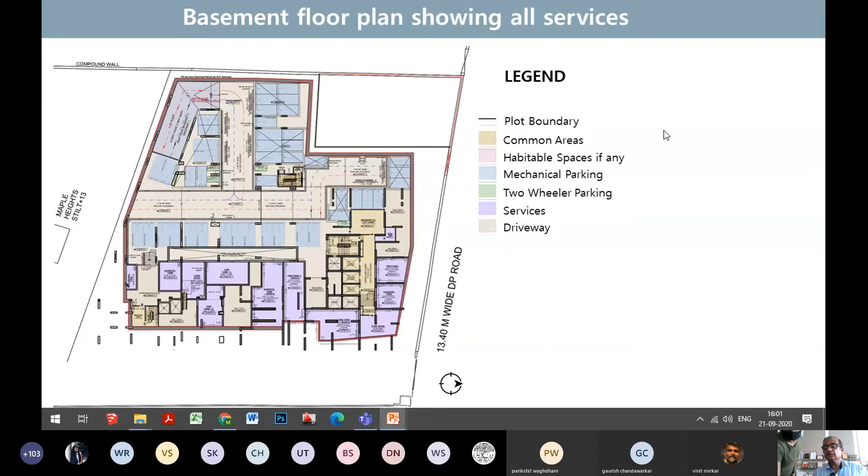Basement floor plan showing all the services. Here the services have to be shown wherever services are there, the STP is marked here, and the staircases are there, the pump rooms will be there. So there are additional staircases going from basement to the ground floor. All these services have to be incorporated in the plan. These are all services at other levels, at ground floor, and these are all at podium levels.

Solid waste management has also become a very important criteria now, where we have to propose OWC at the stilted portion. So these are all solid waste provisions. Of course, all this calculation will be given by the MEP consultant, and according to those areas, we have to provide OWC area for calculation.

The criteria for solid waste calculation in residential is normally calculated as 0.45 kg per day per person. Normally every flat it is 5 persons, this is a thumb rule which MCGM adopts for supplying water, so that is the criteria being adopted. So every flat will have 5 into 0.45, that is how much waste one flat will generate in a residential building. Out of that, biodegradable will be 60% of total waste, and non-biodegradable will be 40% of total waste.

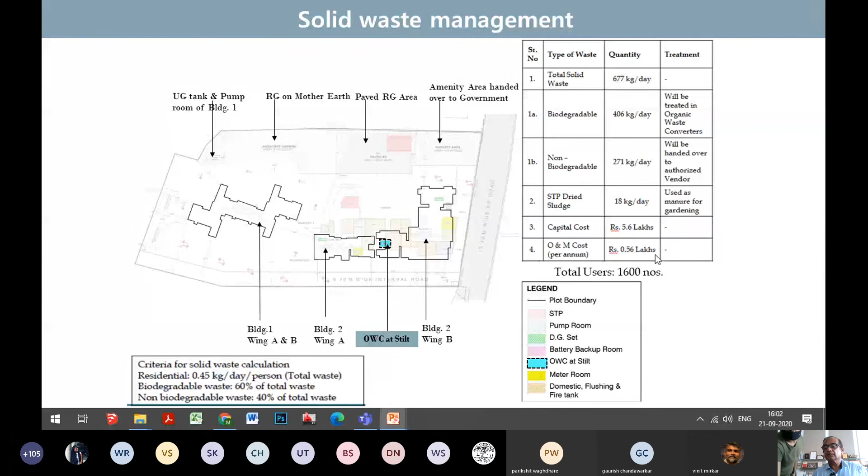So we need to make the provision in the OWC where this location has to be marked. Of course, this total cost, these are all MOEF criteria, because that much corpus the developer has to give to the society so that they can have a running cost out of this.

Sewage generation and STP capacity are worked out by the MEP consultants, and these are all STP areas which need to be provided. Now they want 40% of the area to be ventilated, that is, they require open to sky. So this is also one of the criteria which needs to be looked into.

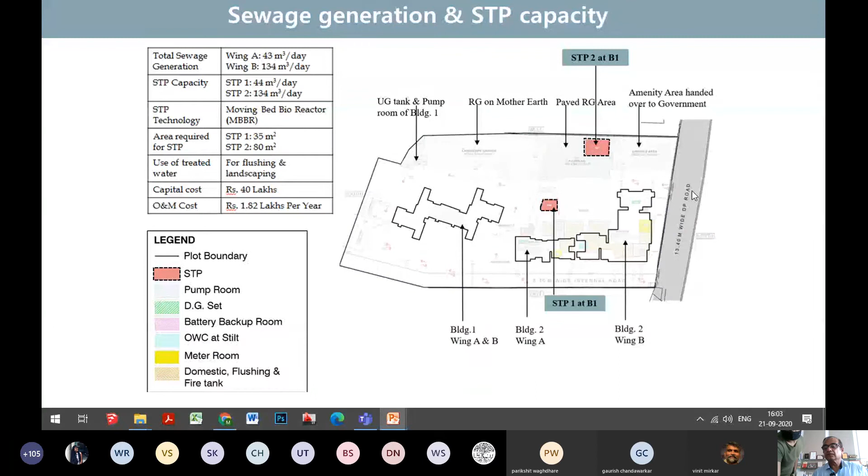These are fire tanks. Normally, when we obtain CFO NOCs, they give the capacity of the tank in liters, so this is converted into cubical content for the fire tank. This is the domestic tank, and this is the flushing water tank, and they have to be marked properly on the plan. This can be proposed in the basement, and at different locations you can propose that.

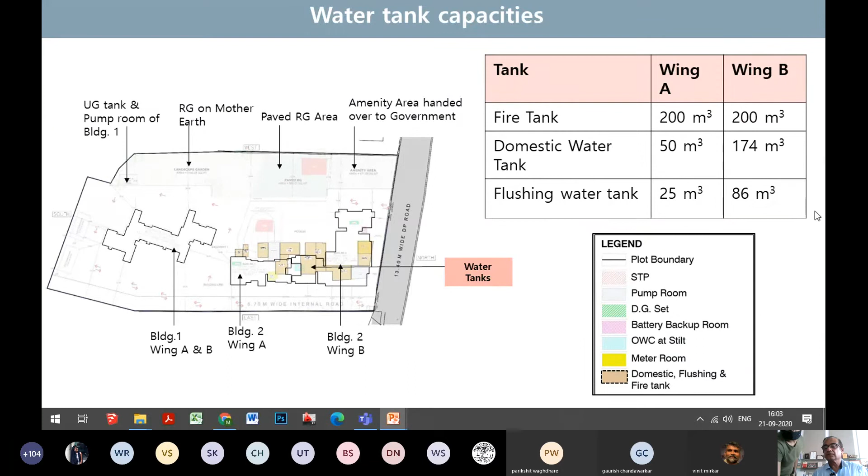This is rainwater harvesting. Now the ground water table level is 2 to 4 meters. Size of water tank in this particular building, we had provided 11 cubic meters. In wing B we had provided 38 cubic meters, and this is the size of the rainwater harvesting. So this is the criteria for runoff for the natural drainage.

In this particular example, the month was calculated as July. Average rainfall is calculated, rainy days are calculated, average peak rainfall is calculated, then the terrace area which will be the runoff, total terrace area is calculated and placed here, and coefficient of runoff is 0.9. So 0.9 water will be going into the soil, and the runoff generation will be so much, and ultimately how much cubic meter of stormwater drain we need to provide.

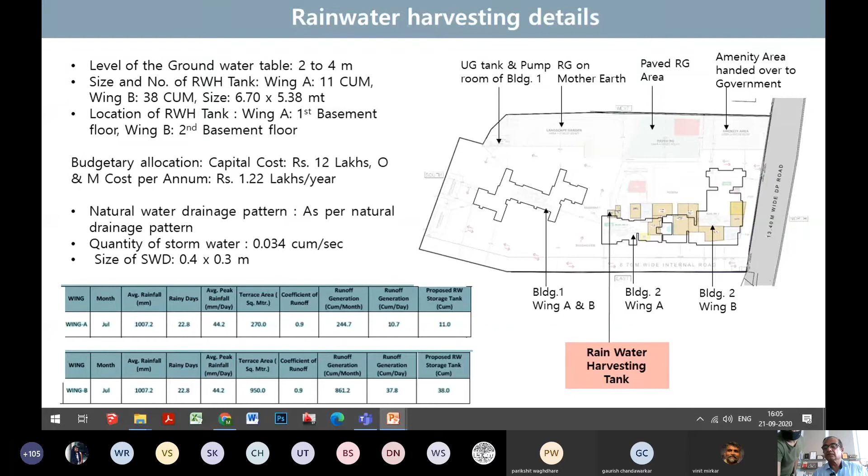So these all criteria will decide what will be the size of the stormwater drain which you are going to propose inside your plot. And rainwater harvesting, wherever 2 water tanks are provided, it will collect 1 day's water which can be recycled, used for flushing purpose, gardening purpose, car washing, or any other purpose. Now the DG set is also an alternate mode of supply of electricity.

Suppose there is a power failure, then the DG set needs to be provided, so there will be uninterrupted power supply, particularly to the lifts, because the lift and few electrical appliances within the flat, and common lighting, can be taken care of by this DG set. So here the important criteria is how much dependency you are able to reduce on the electricity.

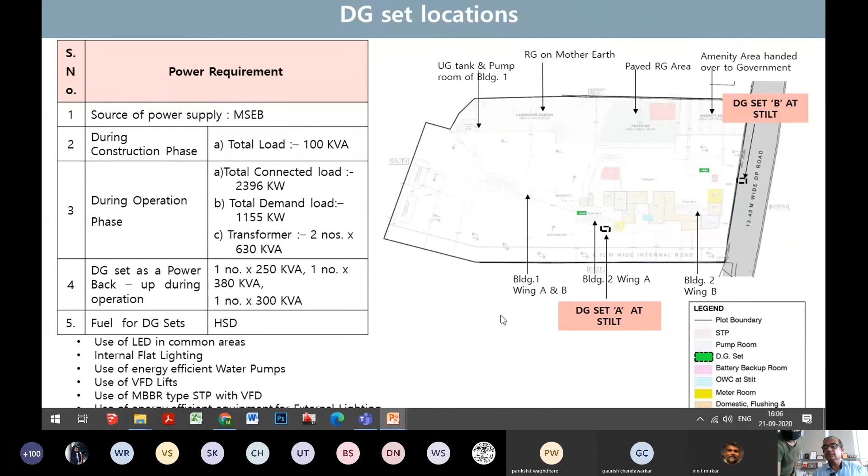So they ask to use LED in common areas, internal flat lighting, use of energy efficient water pumps, VFD lifts, and MBBR type of STP with VFD. By using all this methodology, they will use less energy, and in this criteria we have shown total 19 plus 4, 23% we have reduced the capacity requirement.

Earlier it was a 30 lakh requirement; this was brought down to 25 lakh. So 5 lakh was reduced by using some of the measures where LED lights were provided, solar lighting was provided, and other criteria were considered. This is the important criteria because they always concentrate on how energy efficient your building is, how much dependency you are able to reduce. So minimum 15 to 25% if you are able to save, they will always prefer those criteria.

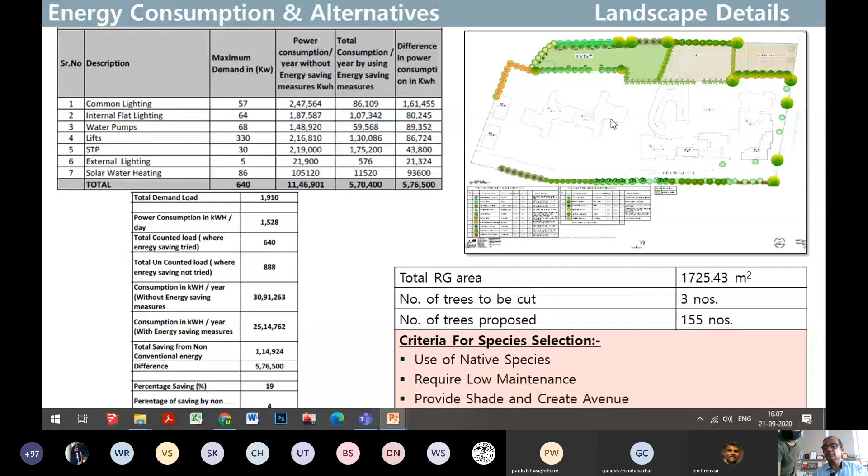And the other part is the landscape part, the plantation, which type of plants you are going to provide. Native species are always preferred as they require low maintenance, so whenever you are planting trees, they have to be low maintenance trees so that they will survive for a longer time and provide shade and create avenues also. These all criteria, how many trees you are going to cut and how many you are going to replant, are also one of the criteria which MOEF definitely looks into.

This is the fire tender movement. Of course, for the high-rise committee, it was a different criteria. Normally for MOEF criteria, they would prefer the fire engine to move all around the building, that is 6 meter open space.

However, if you are proposing a podium, and if you are able to convince, 3 side open space are good enough because you have proposed refuge areas on the side where the fire engine is going to approach, so they may consider that leeway. Fire engine movement also has to be provided: single driveway minimum 3.6 meters, and double driveway of 6 meters. This is the criteria they look into.

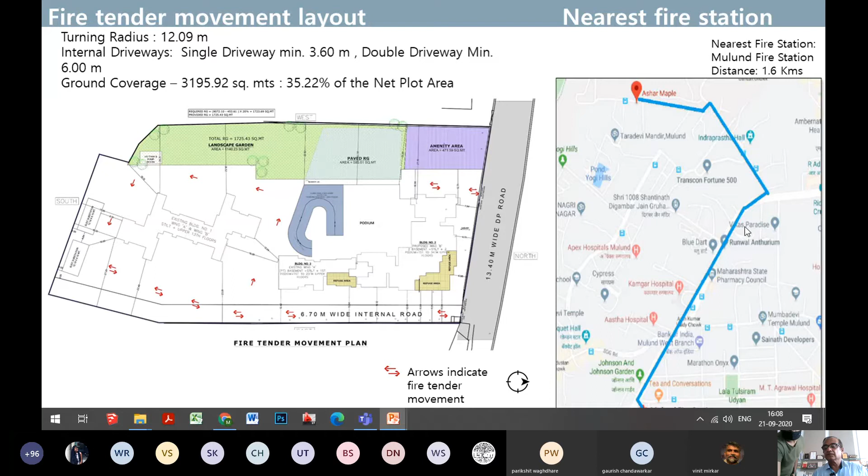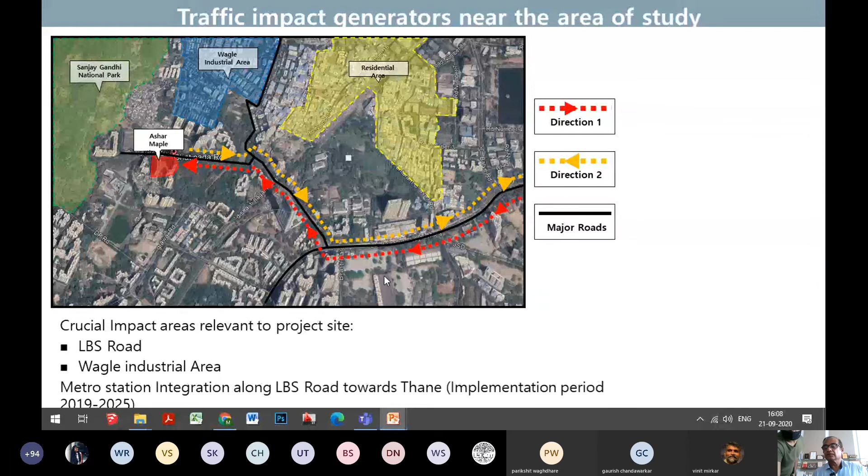One more criteria is wherever your site is situated, there has to be a fire station within 5 kilometers. If you are more than 5 kilometers, they may not approve your high-rise buildings. This is the criteria MOEF follows. But normally in Mumbai, within 5 kilometers the criteria is met, because fire stations are spread widely in Mumbai.

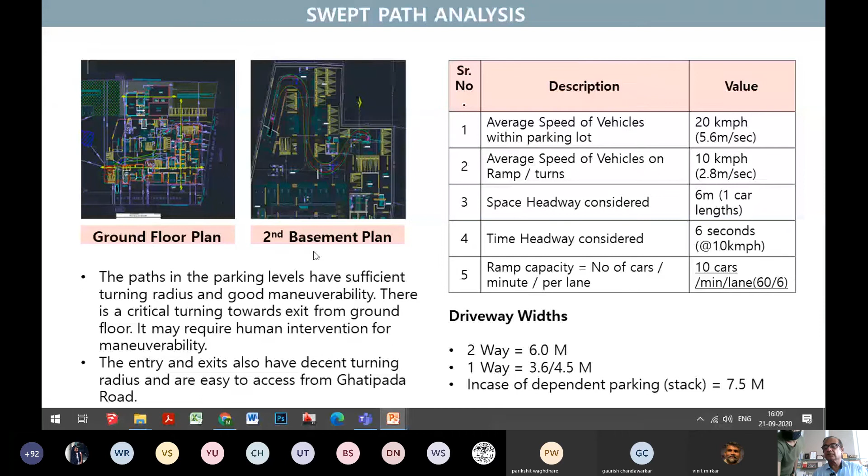In case of dependency, if there is stack car parking, 7.5 meter open space, I mean driveway, will have to be proposed. For good maneuverability, these are all the important criteria for finalizing your basement movement as such.

So in a nutshell, this is the summary of our high-rise buildings. First, we looked into the access criteria for high-rise buildings. Minimum width of road were 70 to 120 meters - 12 meter road, and more than 120 meter road requires minimum 18 meter road to be proposed.

CFO requirement: refuge area of 4 to 4.25 percentage, and additional staircase area above 70 meters will have to be proposed. And statutory requirement - what is counted or free of FSI, loading provision as per the plot area, then basement, how we need to propose a basement, access how to be provided, and compartmentalization how we will do it.

Staircase travel distance will be different in the upper building - the travel distance criteria is different. For a basement, the travel distance area is different. Podium, where only 6 meter you can set back your buildings, and 3 meter from side open space. And parking requirement, we saw how much podium we can propose - that was 32 meters height of the podium.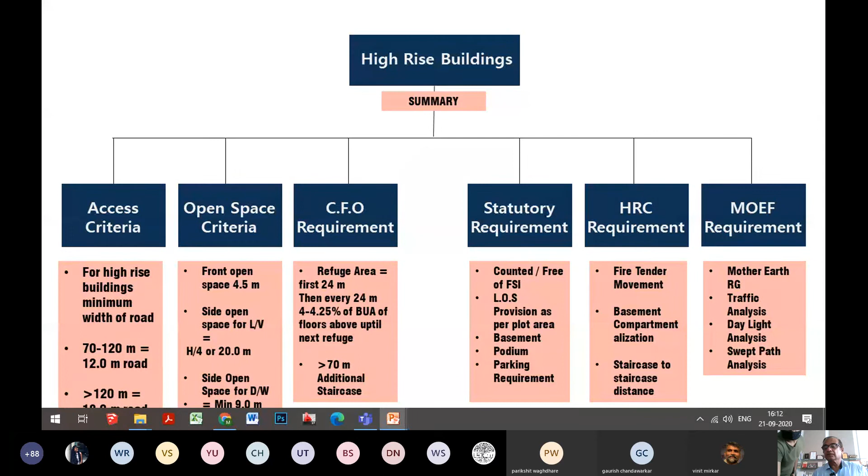And traffic analysis we saw, daylight - how it is affecting lighting and ventilation, and the shadow, how it is impacting the adjoining building and within your building, and swept path analysis - how the car parking movement will be, how fast the evacuation will be for the cars in the basement or podium. That also will be looked into by the MOEF authorities. I think with this we are coming to an end.